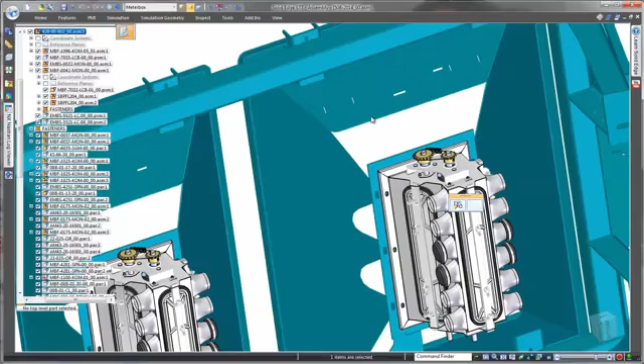Solid Edge excels with large product structures, and designers can work efficiently in the context of thousands of surrounding components by quickly focusing on a subset of the overall product.

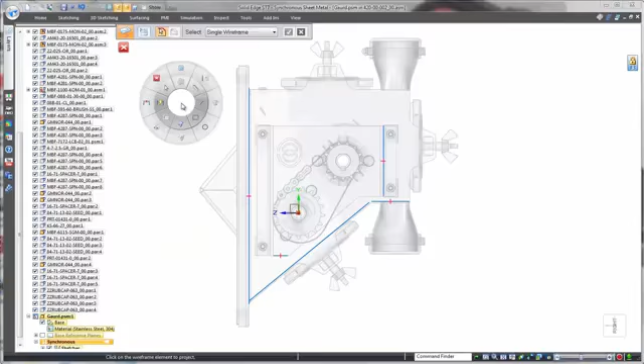Watch as construction of the safety guard begins as a sketch, referencing geometry from the adjacent product structure. Once we have a region encompassed by these curves, we select it to create a sheet metal tab. Solid Edge automatically assumes that a tab is the basis for sheet metal work, so no specific command is needed. Continuing to lean on the inherent intelligence within Solid Edge, we'll create four flanges by selecting and simultaneously dragging appropriate thickness faces.

Using a corner point from another component to define the flange length, we work directly with the geometry. That's creation in Solid Edge.

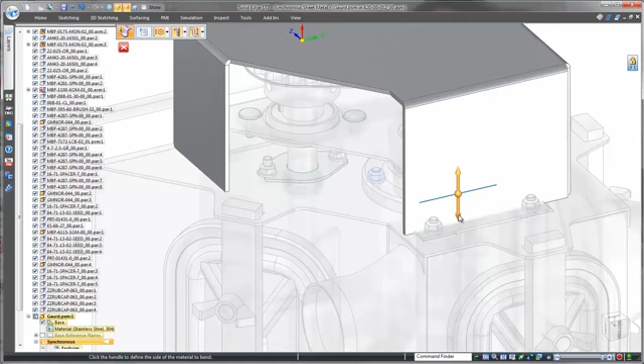We'll quickly define a jog to prevent interference. Solid Edge commands are intuitive and fast. Partial flanges can be defined and customized via the innovative heads-up command interface. Design intent is incorporated by relating faces.

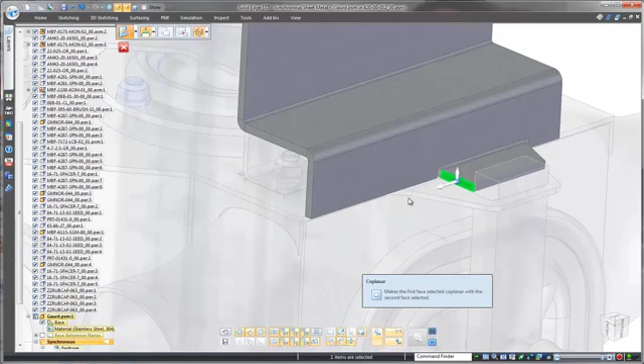When flange sides need to match those from adjacent components, the handy radial menu initiates a simple sequence of picks to get the job done. Solid Edge makes easy work of reorienting and extending flanges, often removing the need to measure angles and distances.

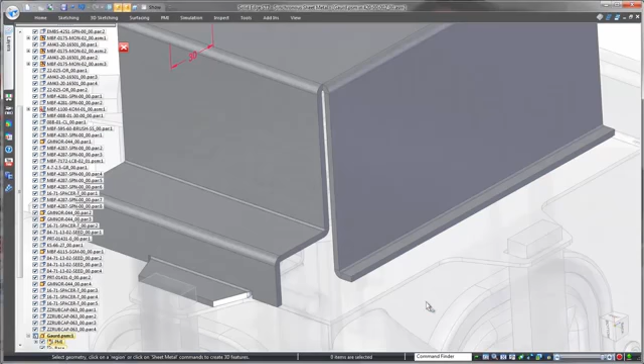For visual face modification, the handy steering wheel is always available. And when driving dimensions are necessary, it's easy to place them on the 3D geometry and change them as needed.

Using surrounding geometry, creating sheet metal features like this dimple is fast and accurate.

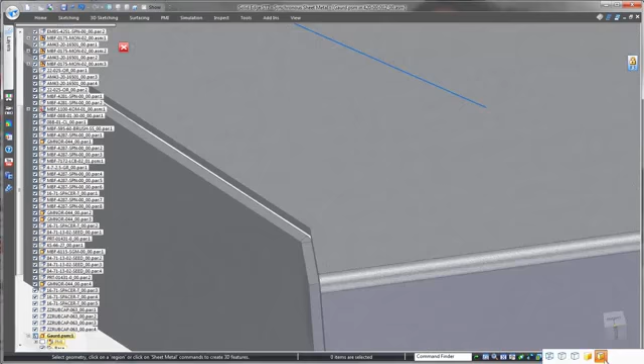For manufacturing purposes, Solid Edge flat patterns always show the most efficient cut sheet size, and that's great for nesting.

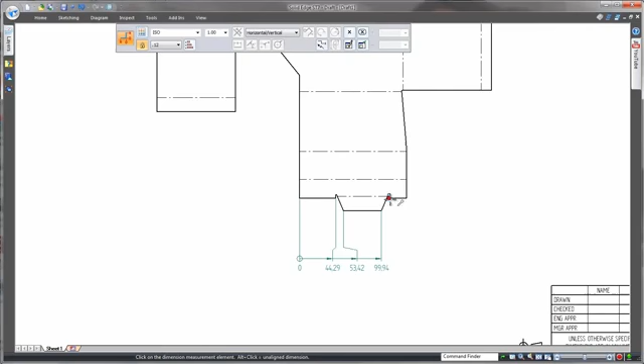The Solid Edge drafting tools facilitate creation of dimensioned drawing views fully associative to the model. Note that as we close the drawing and return to the assembly, the guard is placed in all three locations in the meter box. Solid Edge contains a full set of sheet metal construction commands.

Watch as a rectangular to circular plenum in the blower fan assembly is lofted between existing parts.

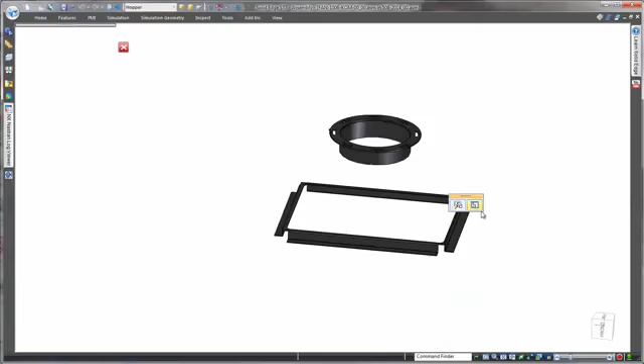Another strength of Solid Edge is the ability to wrap sheet metal around a solid part. This conversion of a solid block into sheet metal is especially useful for complex shapes, as solid modeling is often faster and easier. Now that's productive.

To integrate with your CNC machinery, Solid Edge flat patterns can be exported into a DXF format with intelligent layer control.

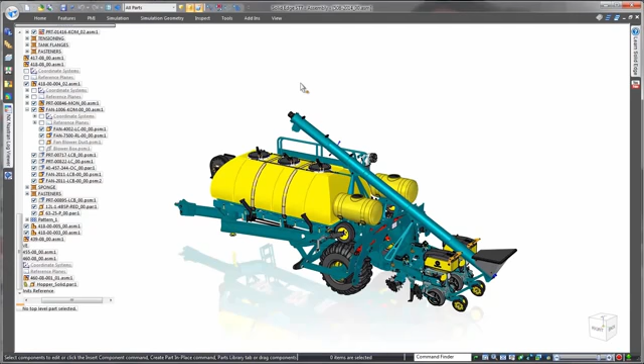Direct interaction with surrounding geometry, coupled with industry-leading design tools and innovative modeling capabilities, makes Solid Edge the choice for companies looking for an edge over the competition. Solid Edge. Design better.